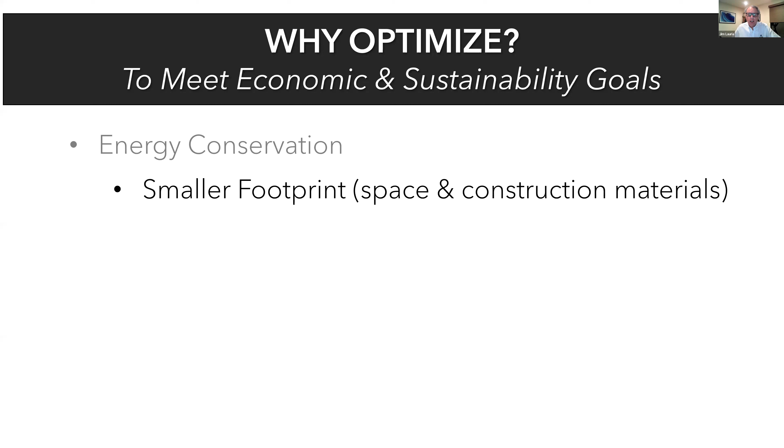Obviously, with what's going on with the price of oil, natural gas, anything you can do to conserve energy is going to improve the bottom line. And also, you're going to reduce greenhouse gases. Another one is smaller footprint, not only in terms of real estate, but in terms of construction materials. So you're talking about steel and concrete, and obviously that's money. And also, to produce concrete, a lot of energy is used, and you're talking about greenhouse gases.

Decreased chemical usage, not only in terms of chemicals used in the process, but we've heard a number of times about using chemicals for cleaning membranes and other filtration media. Reduced maintenance, downtime. If you're not having a piece of equipment working, that's going to mean that there's no water going forward, and that's time lost.

Improve further downstream processes. And I'm going to offer a couple of case studies as we go through the presentation to talk more about that. Water savings, we talked about that. If you don't send water forward and you're wasting it, you're losing it, that's lost money. And then maybe most importantly at the end is employee and end user safety, important aspects.

So the first case study I'm going to talk about is the city of San Angelo, Texas. They were starting to lose surface water, and they needed to find another place for their water supply. And they found groundwater, but the problem was that groundwater was contaminated with radium, a radioactive material. So you can see those blue tanks in the back. Those are ion exchange resin beds, and they could remove the radium.

But they also found they had iron in the water, and they didn't want to use those resin beds to remove both the iron and the radium, short cycles, and really problematic. So they decided to use Mazzei Venturi injectors to inject air to precipitate out the iron, and a secondary mixing device. You can see that on the right-hand side, a pipeline flash reactor that they could mount above.

And that offered a couple of good benefits. Number one, they didn't have to break pressure coming from that groundwater source. They also got homogeneous mixing, which gave a better particle size distribution to go to the media filters. So it offered longer filter runs, lower energy costs, and less backwash water, all improvements in energy. And they didn't have to build a basin where they'd have to break pressure. It also reduced the amount of concrete and steel for this particular case study.

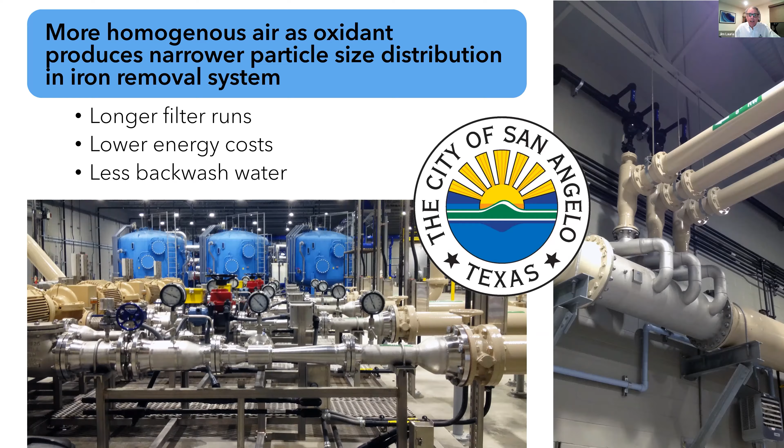The next case study was White Rock, British Columbia. The advantage there was using Venturi injectors. They had to use ozone. They couldn't use air as an oxidant because they were trying to remove arsenic and manganese. That was a good opportunity to use the Venturi injectors and then the secondary mixing device, a pipeline flash reactor again, so that they could improve the ozone mix and get a reduced amount of ozone, very high mass transfer rate for the optimized ozone contact time.

What that offered was better mixing and a lower amount of ozone, which meant that they could use less electricity on their ozone generator, less maintenance. Another benefit was that due to the increased mixing and reduced amount of ozone, they were able to reduce the potential formation of bromate, which is a disinfection byproduct.

And as in the earlier case study, it reduced the footprint of the system, less steel and concrete, but also less real estate. And because they didn't have to put in these basins, they didn't have to expand the facility, and since this location was in a forested area, it reduced the number of trees that they had to remove on site.

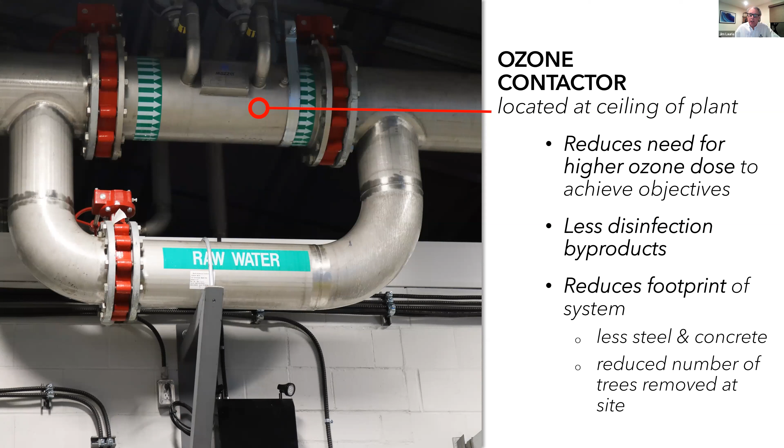Next case study was the city of Wichita. This was an aquifer storage and recovery operation, and they were taking water from the local river. And because this was in an agricultural area, they were getting irrigation runoff with some herbicides, atrazine, and they needed to remove that atrazine before they put that into the aquifer storage and recovery system. So they were using an advanced oxidation system. And what that did was allow them to break up the herbicide and destroy it.

But during the advanced oxidation process, they had some entrained gas, some gas bubbles. So they needed to remove those gas bubbles, and they put in these centrifugal degas separators to remove that so that they could improve the downstream process, the filtration process, and get more efficient filter operation.

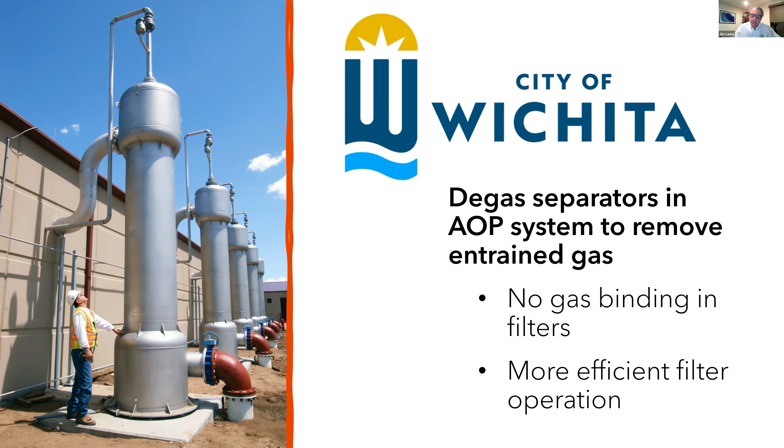The next case study was Pure Water Monterey in California here. And in order to use and design the system most effectively for ozone treatment, which was at the start of the process, they used computational fluid dynamics. And this was important because the Pure Water Monterey process had to treat a wide range of different waters that they were using for the water reuse. Irrigation runoff, water coming from the municipal wastewater effluent, stormwater runoff. So they needed to be able to design this in such a way that would be effective to make sure it was prepared before the downstream filtration processes.

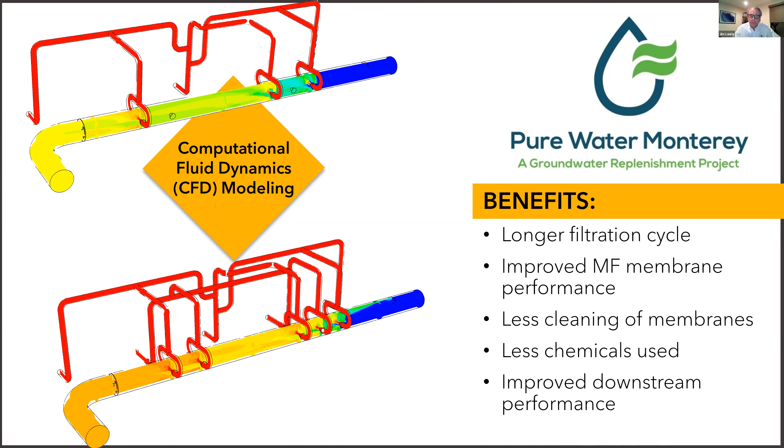So they had longer filtration cycle, improved microfiltration membrane performance, less cleaning of the membranes, obviously less chemical used, and improved downstream performance. And this is what the process train looked like. So the ozone was used both for disinfection to kill any pathogens, but also to help improve the filtration on that membrane filtration that was protecting the RO. So as I mentioned early on, to improve the upstream processes, if you start a process and it's inefficient, it's hard to recover from that inefficiency. So you really need to make sure those upstream processes are most efficient.

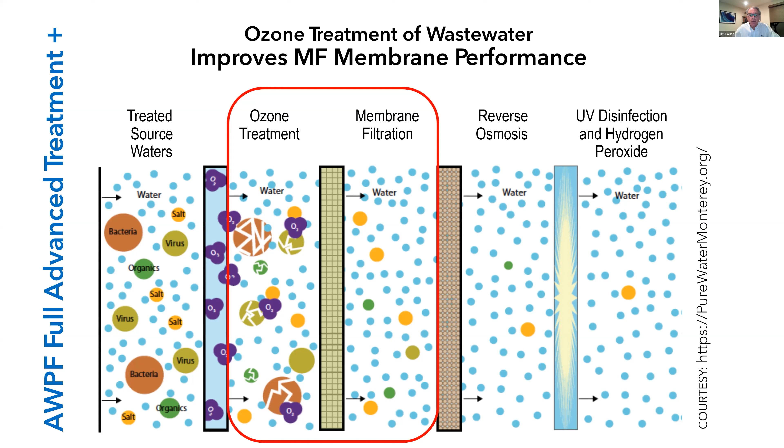And then there's one process that's gaining traction, ozone plus biologically active filtration, BAF. And basically it's ozone in front of some type of media filter. And that media filter can be sand, it can be anthracite, it can be activated carbon, and it has microbes on it that can digest organic contaminants. And what the ozone does is it breaks up those long chain organic molecules. So it makes those organic molecules bite-sized pieces, if you will, so that the microbes on the substrate of the biologically active filtration can digest them.

And this is important because now with this system, you're destroying rather than concentrating the contaminants. With RO, you're using the membranes to basically concentrate, and you've got to get rid of that concentrate, either in the ocean or in a deep well injection. And also, the ozone plus BAF typically is a lower cost operation.

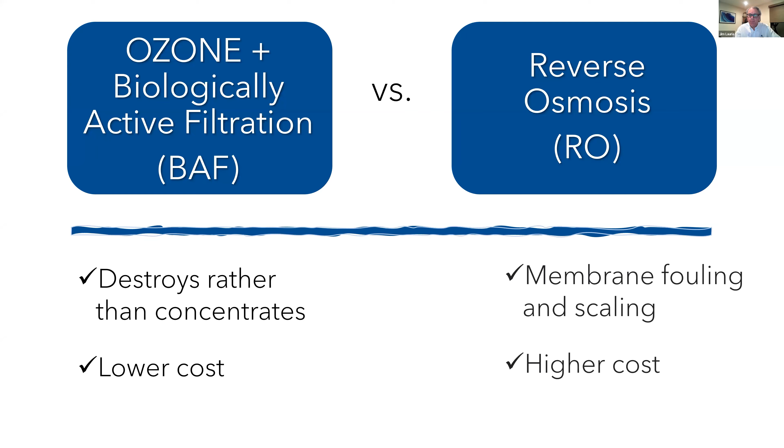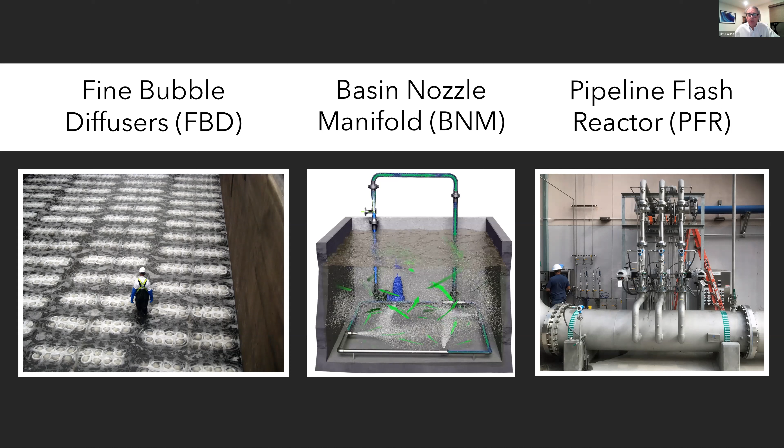And I just want to finish up with showing the different types of getting in these oxidants, typically the oxygen species, whether it's air, pure oxygen, or ozone. You can use fine bubble diffusers, but what we found is Mazzei Venturi injectors with either a basin nozzle manifold or a pipeline flash reactor offers a number of benefits. And I'd be happy to speak about those with anybody who would like to talk about them.